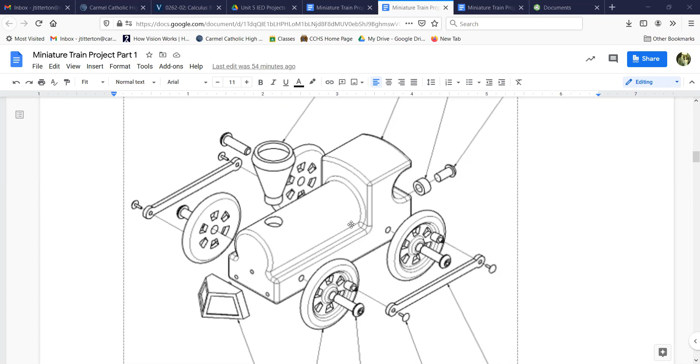All right, we're going to make a train body here. This is what it looks like all put together, but we're just going to do the main body. We have directions down here—I have these printed off. It's dicey, it's hard, we'll see how people do. I've already created them all. This is where we're going with this.

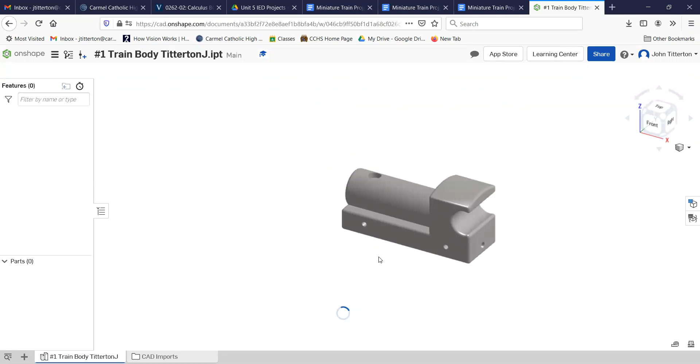Maybe. All right, so you can see it. Not too bad. And then you can actually see it assembled, if I'm not mistaken.

No, I must put it somewhere in here. I don't know where I assembled it. So yeah, let's go to it.

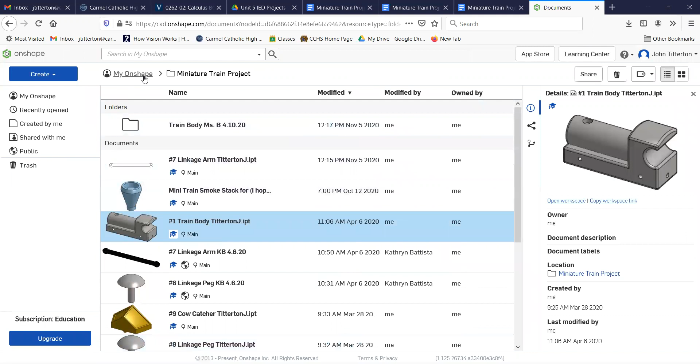I'm just going to go into OnShape. I would recommend making a folder—actually, you have to make a folder, but I'm just going to make a document. Practice train body. I was going to say I actually spelled it right. No, of course I didn't.

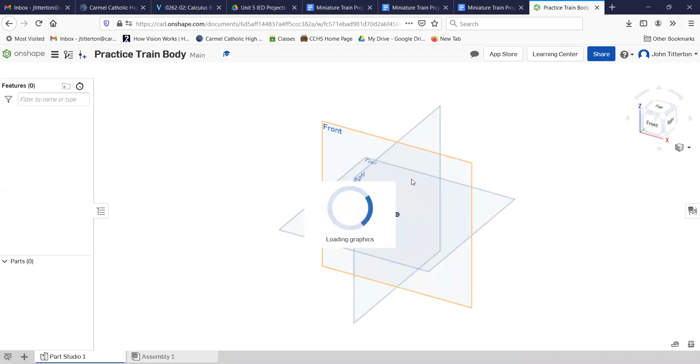Let's go make a train body. Let's go make a train body. Sorry, you don't want to hear the singing.

All right, I'm going to do the cross section first, so I'll call it the front view. Sketch there. Let's start at the origin.

And 5.5 seems to be the length. It's a tough drawing to read, but that's 0.875.

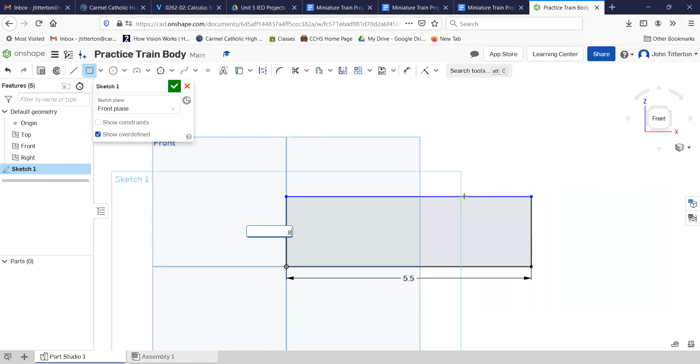Yeah, that'll work. And then another rectangle, starting at this point, and it is 1.75 wide.

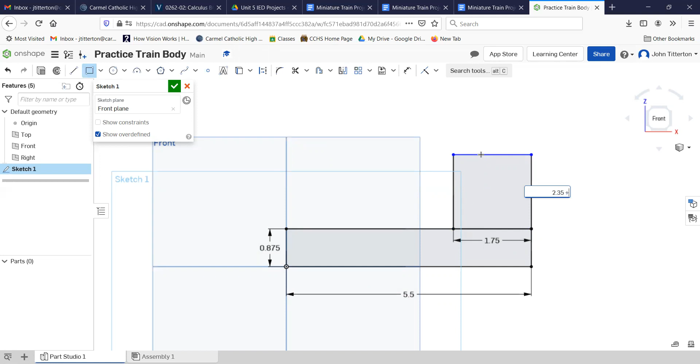And it doesn't say how tall it is—well, it does, but it's a little tricky. I think I'll make it as big as I have to: 2.35 plus 0.375.

And then I've got to carve it out later. The back's actually got a curve on the top, so there's a couple different ways to do that. I'm going to carve it out.

Okay, let's trim away this stuff. And is there anything I want to do with this to make it easier? I could just put this circle in here.

So let's see, we need a line and we'll snap it off of—I don't want to go to the center, we'll go somewhere horizontal. And that should come over 0.25.

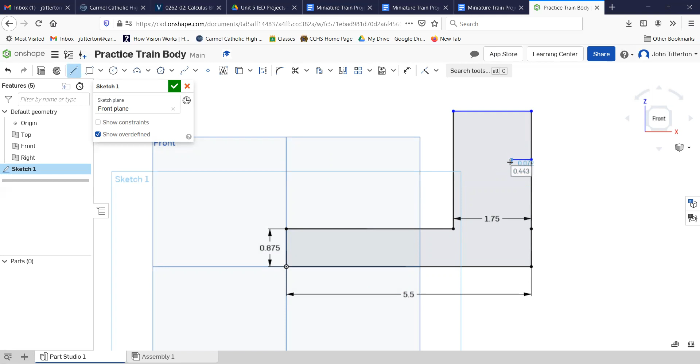And we need a dimension to it from the bottom, which is 1.75. So that's the center of a circle we're going to make, which is a radius of 0.5, so a diameter of 1.

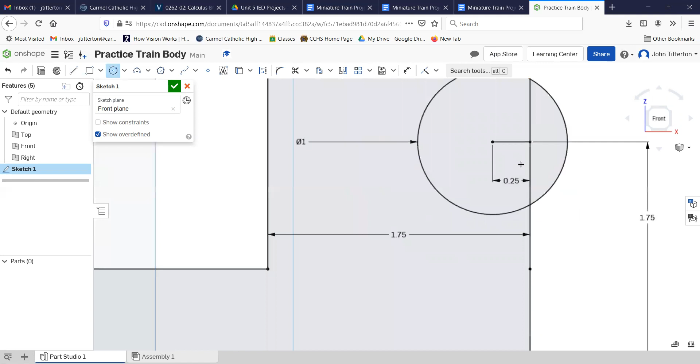I got to trim all this stuff out of here. Oh, it's got a tangent line off the top.

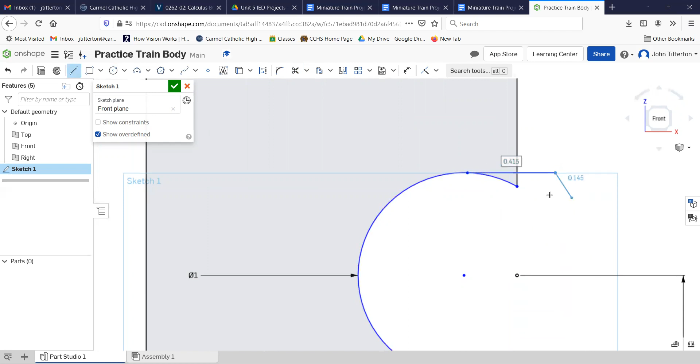I think I'm okay with that. I'll use a tangent constraint. We'll just go here and horizontal, escape the line, and then we'll make sure we are tangent.

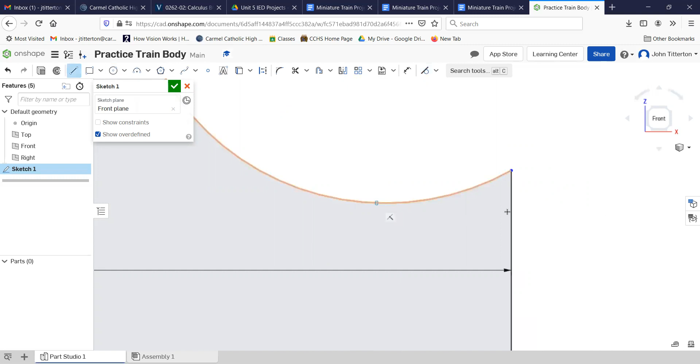Good, wasn't tangent. Down here, same deal. Let's go with a line, make it horizontal, escape the line, and then tangent.

Good, and let's trim out some stuff. Oops. Thank you.

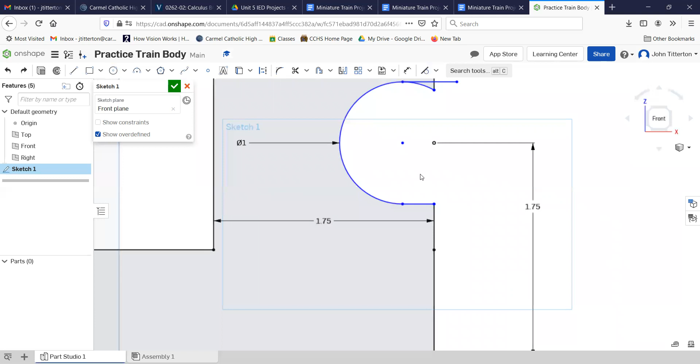Could I do more? No, that's pretty much it. Finish.

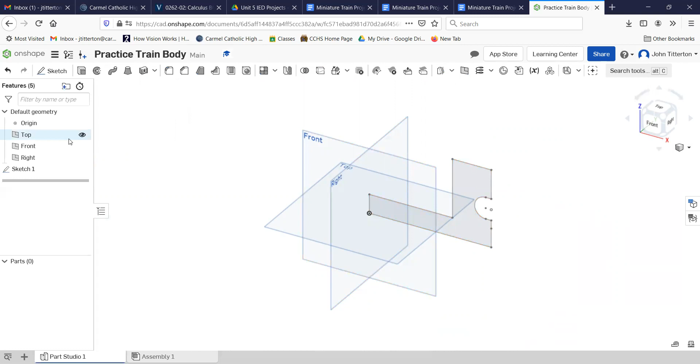Front. Now, if you've ever watched my videos, I tend to start turning off these views. I'm actually going to leave them on now. And we're going to...

Extrude 2 inches. So, 2 inches. Not bad at all. Check, we're good.

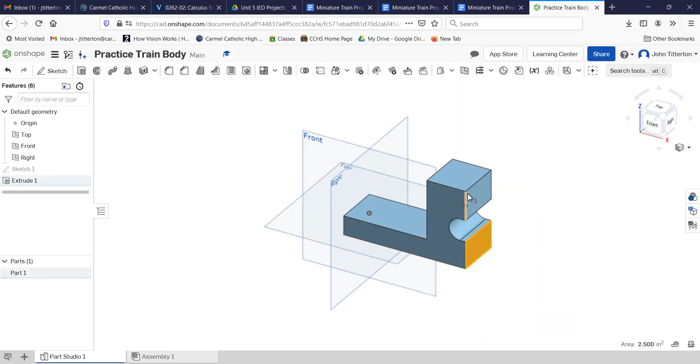All right, so I'm going to do the back because that's the tough one. Let's do a sketch on the back, which will cover the top half too. And we need a point here.

Center of our circle, it's about here. We're going to come up—I'm just going to go with that. And it should be 2.35 times 2.

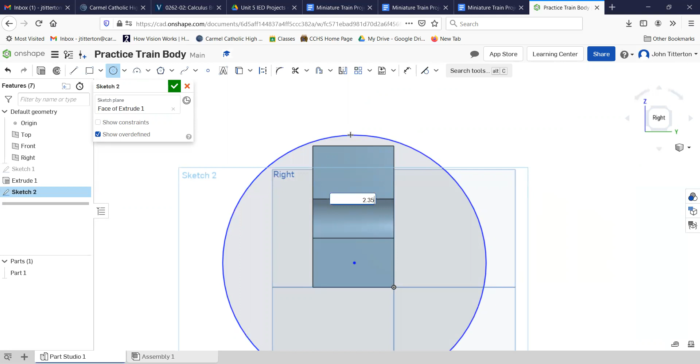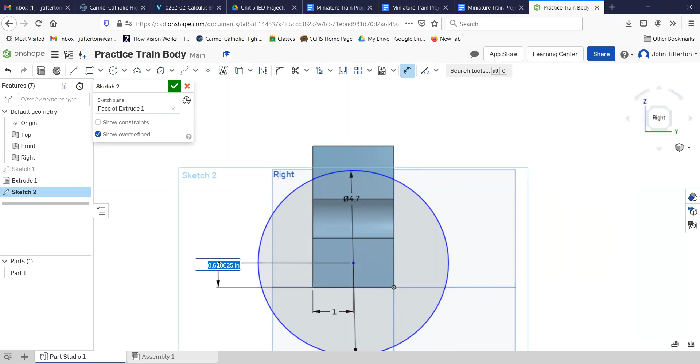All right, we're going to shave this off, but not yet. We got to get it in the center, which is 1 inch. And then I got to get it the proper height, which is 0.375.

I'm confused as to why my circle's up so big. Well, not going to worry about it.

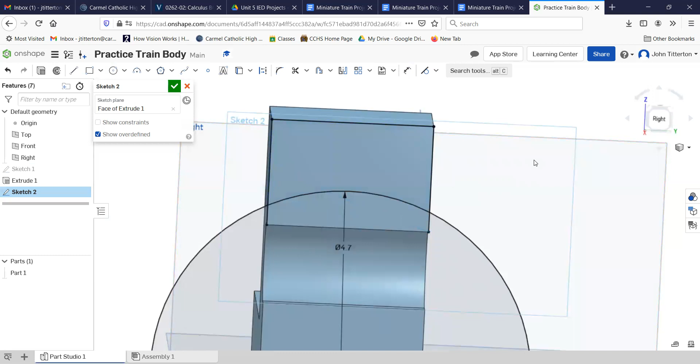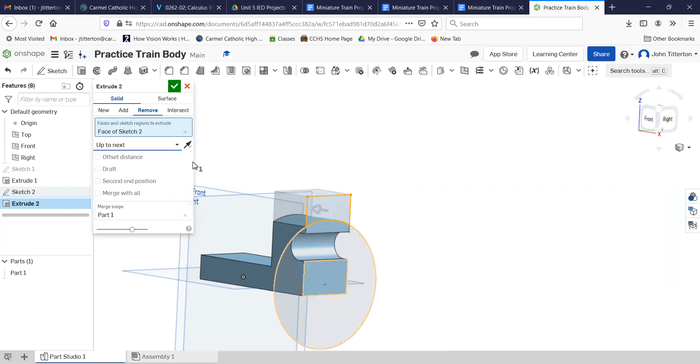Escape line, make sure I'm looking directly at the back. Yeah, I got a shape. I don't have to trim anything. It should all vanish. If not, I'll change it. So done. And we're going to extrude. We're going to extrude a cut this time. I'm going to pick this. We're going to say up to next. Nice. There's the top of the train, and notice all the other stuff vanished.

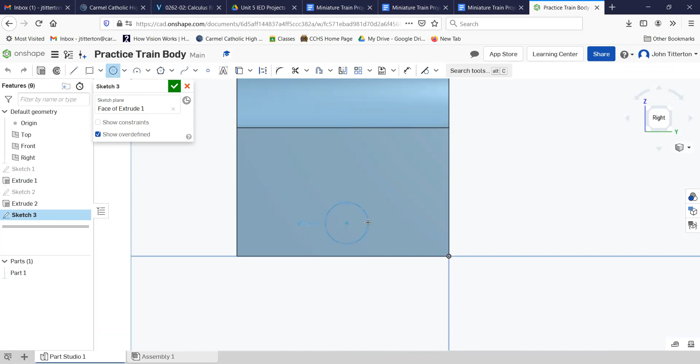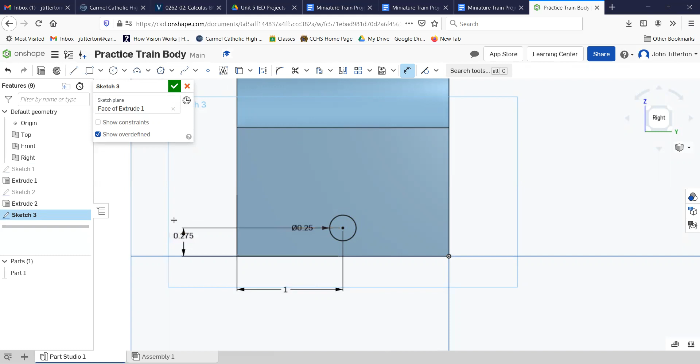I do need to put a hole here. Since I'm staring at it, might as well. It is diameter 0.25 inches. It is 1 inch over. It is 0.275 up. And I have to extrude it in 0.5. There it goes. The hole cut in the back. All right, so the back looks good.

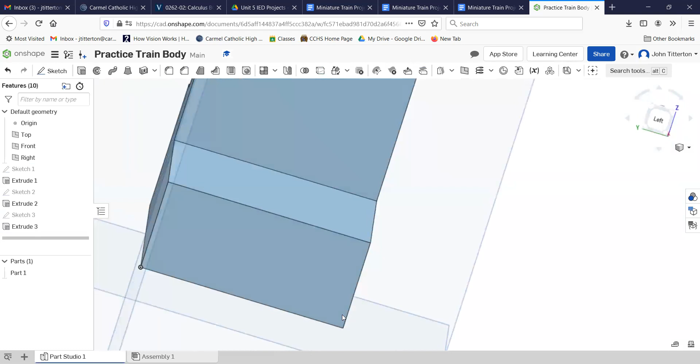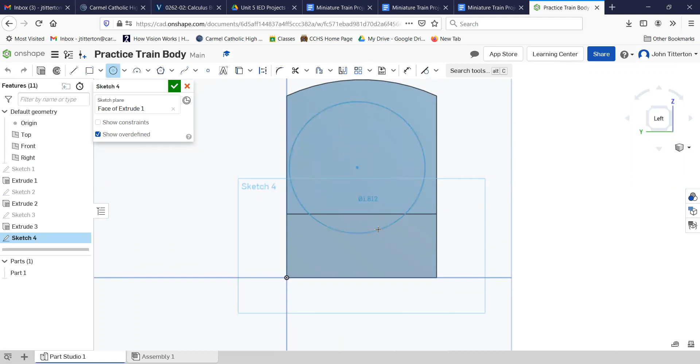Let's go do the front. We got a circle to make. We can make it in this plane. We can make it in this plane. Let me go with this plane for no particular reason. And I'll start a sketch there, and let's look directly at it. Circle's up a little bit higher, like about here-ish. And it is 0.75 times 2. Nice. And it's 1.375 off the bottom. And it is 1 inch in.

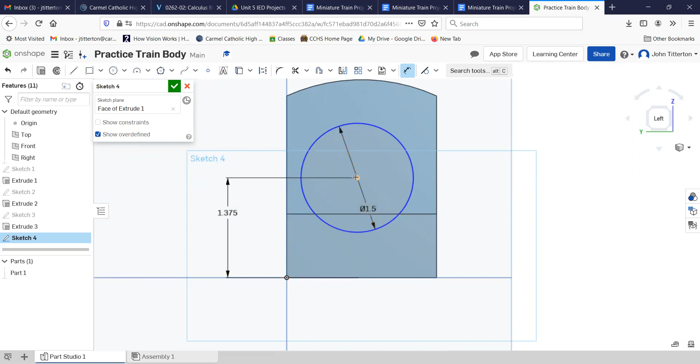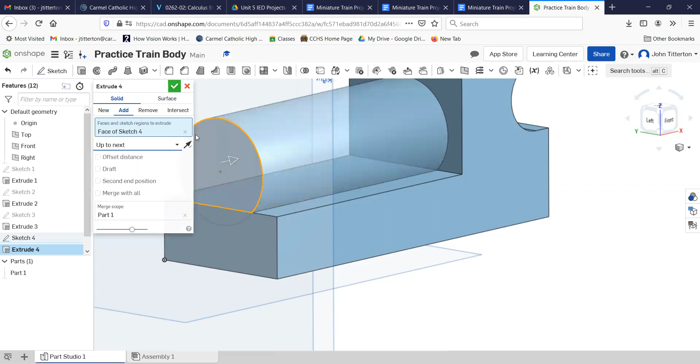That's it, we're done. We extrude to next. Check it. And our body's shaping up quite nicely. Cool. All right, let's put holes in the side. No, let's put holes in the front because I'm facing the front.

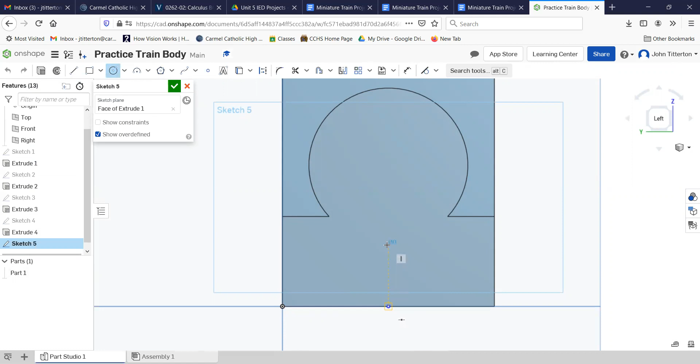And it is sketch 3 holes. They're real small. They're only 0.125 in diameter. One is centered on the center. 0.125. The other 2 are out here somewhere. 0.125. And I'm going to use that over here, so I only have to change one height. So if you didn't see, I hovered over that and it gives me a little yellow dotted line you can barely see. So it just lines them up basically. So whatever this one does, that one's going to do the same.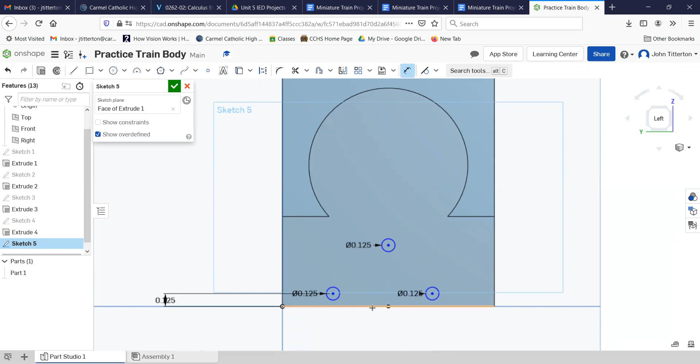And that is 0.125, which seems awfully small. And this one is 0.625. You know, one of the problems with dimensioning these, you're like, hey, I'm done. And no, we're not. You always got to slow the brain down and say, did I get it all? 0.375. Now, those two are not tied together. The one on the right won't move to the right. All right, I take it back. It did. Shouldn't have. 0.625. They're linked top to bottom. They're not necessarily linked left to right. 1.625.

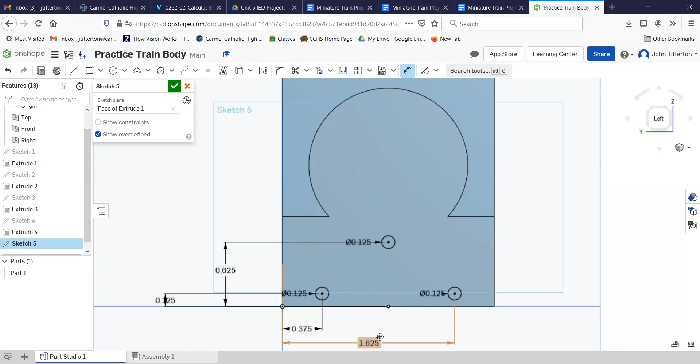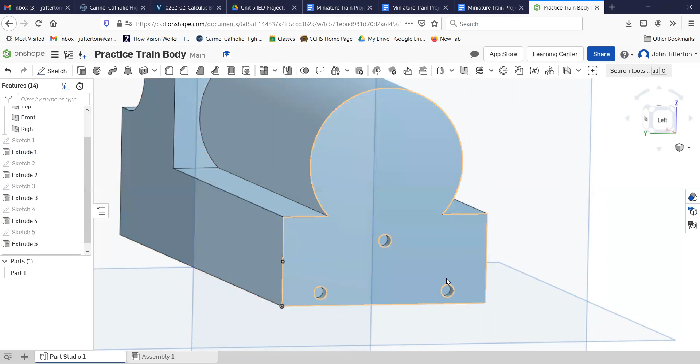Extrude them, and it says in 0.125. Extrude, remove 0.125. Uno, dos, tres. All right, got the front. We got to do a hole on top. That looks hard. Let's do that.

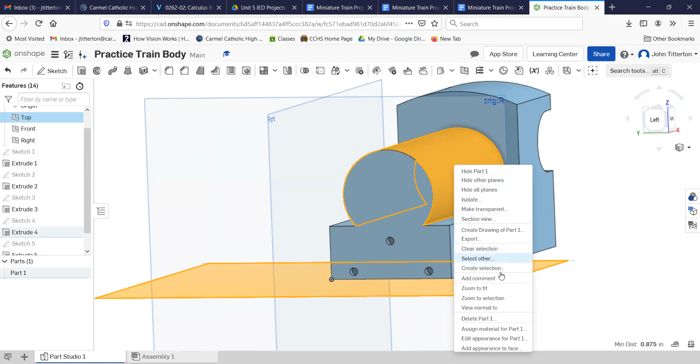Now, I don't know how to make a plane up there, so I want to try an offset plane. Offset plane. Nah, that's not going to work. I want to create a plane. Let's see if it gives me the option here. No, I don't see it. So I have all sorts of tricks for getting planes where I want them, but I should be smart enough to figure out where it is up here. Modify, delete face, move face, replace face, plane. No,

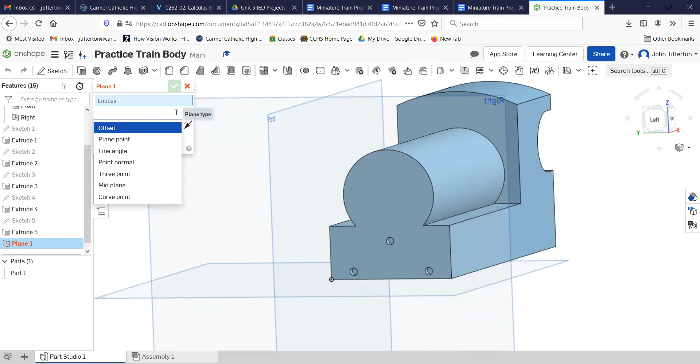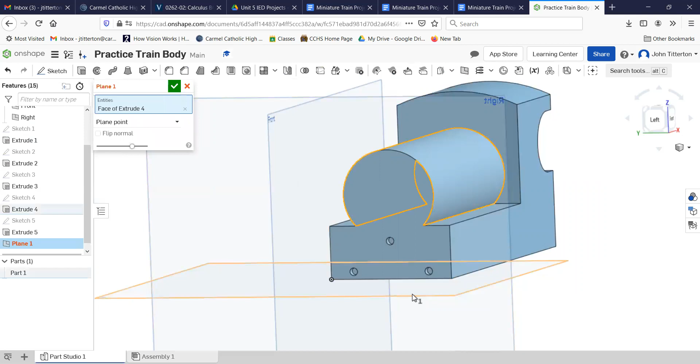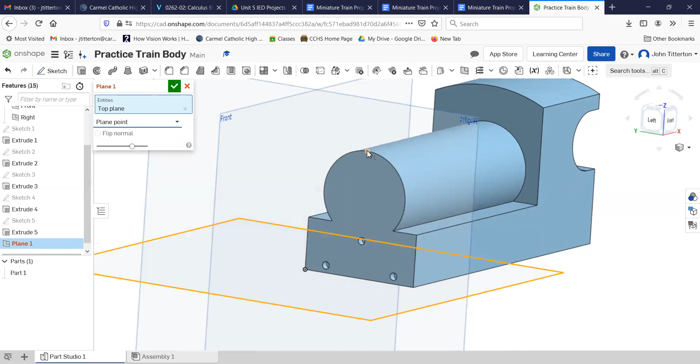you know, I'm going to hover over this, see what it says to me. Create new planes by referencing existing planes. Select reference geometries, set distances or angles as necessary. Well, I'm going to try this entity. And I'm going to try this, see what it does. And plane point. So, oh, did you? It doesn't work for me. Yeah, well, we'll try something else. Exit out of that. Let's try to offset this plane. Offset plane. And let's go with plane point. Pick that. There it is, it worked. That's pretty sweet. Check. Let's do a sketch on this one.

I'm always amazed how many people are afraid of CAD. I mean, just jump in and go. There's nothing else to say. Make mistakes, you make mistakes, not the end of the world.

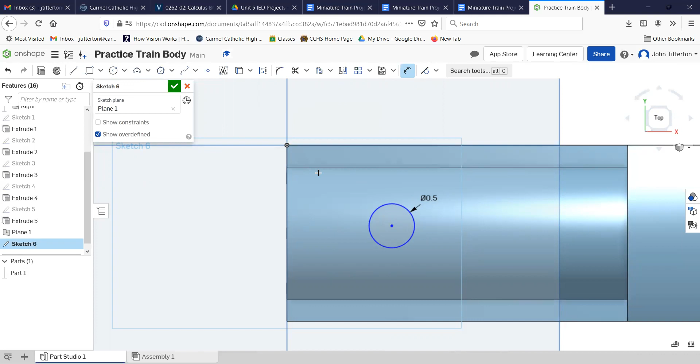This hole is 0.5, and I'm going to extrude it down 0.25. Just I didn't turn, no. Don't know if that worked. 0.5. I was doing something wrong. Okay, and it is on the center line, which I probably could have done a lot easier. It's how far over? It doesn't say, it's just on the center line. So that's gonna be 1 inch from here.

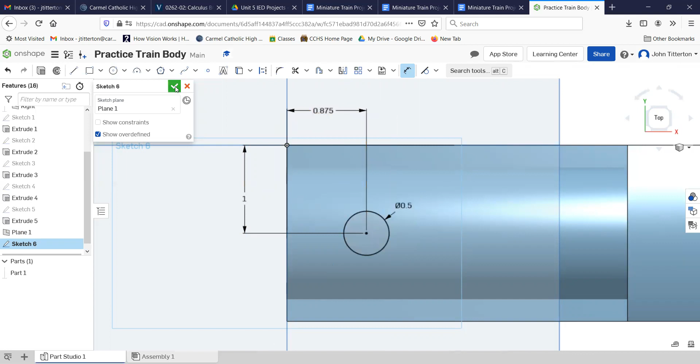Yeah, it looks centered. And then from here to here is 0.875. Check, spin it so I can see it. And now I have to extrude a cut, or remove. It's called cut in the other software we have. And down 0.25. Check.

I'm going to turn this plane off. I don't need it anymore, I hope. That one's kind of tricky. So there's our train so far. All right, looks really, really good. We got that done, that done.

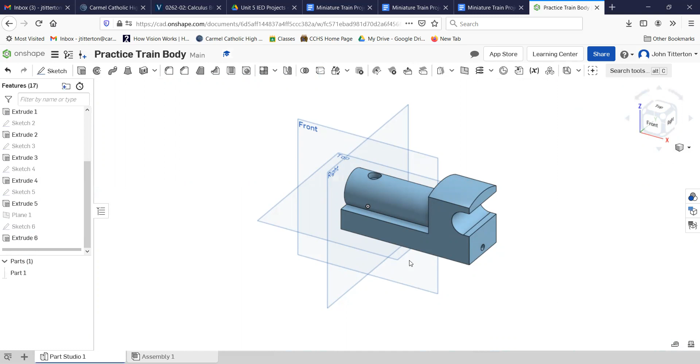We got holes in the side. Now the holes in the side have a thread on them. You can put a thread on them. I will not, because I'm thinking of 3D printing this, and I don't want to put threads in there. It's going to cause problems for the 3D printer. So they are 1/4 inch.

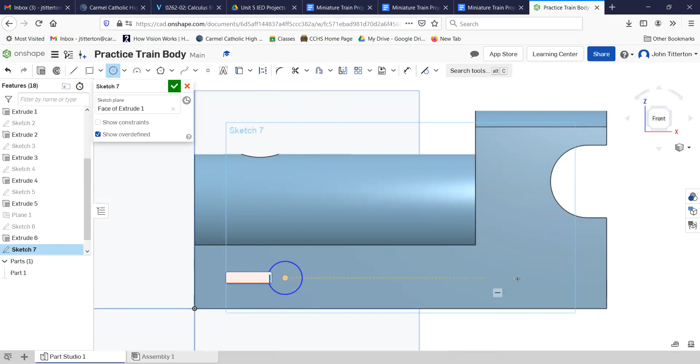This one's about here, 0.25. This one I will lock down in terms of on that same plane. There's my yellow line. This one is also 0.25. This one's 1 inch over here.

Notice my dimensions aren't catching. Maybe my keyboard is finally dying, which I know it is, but I didn't think it was dying that badly.

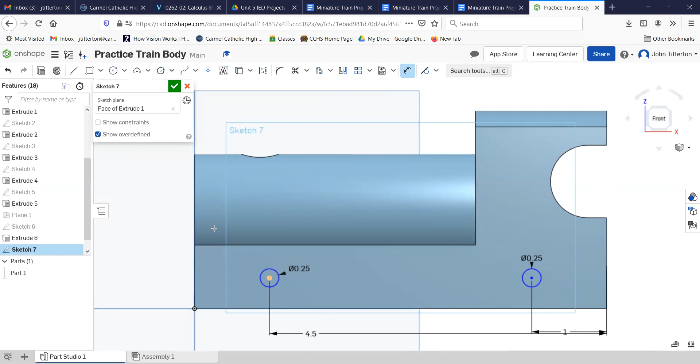1. And this one is 4.5 from the edge. Extrude them down, both down about 0.875. I'm looking, it looks like I've used all the dimensions, so I should be good to go. All right. If I screwed up, then you can yell at me later. Won't be the first time. I just saved that sketch, I hope.

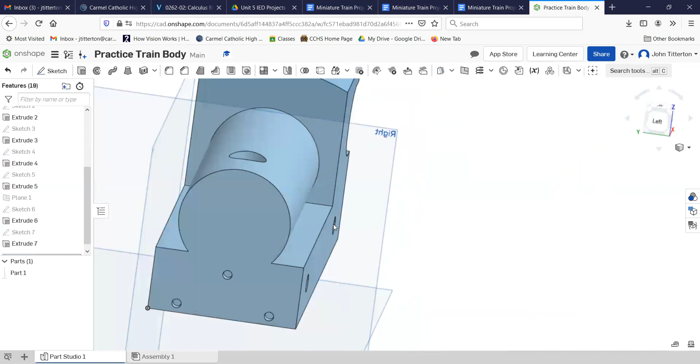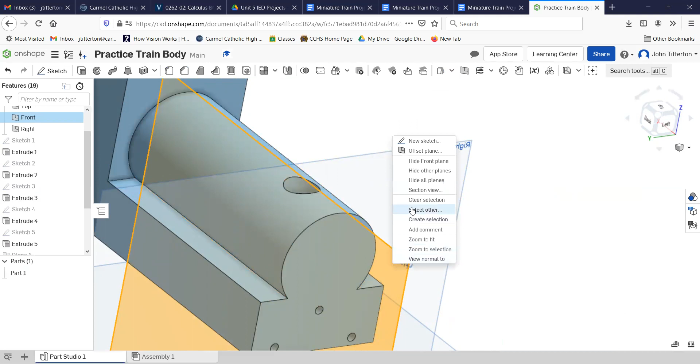Remove 0.875. Check. Do I have a plane down the middle? I do not have a plane down the middle. Sure would be nice if I did. Let's offset this plane. Well, there's my holes. You are going to get offset. So let's right click on it. Offset plane. Or not. Offset plane. And we'll go with through a point.

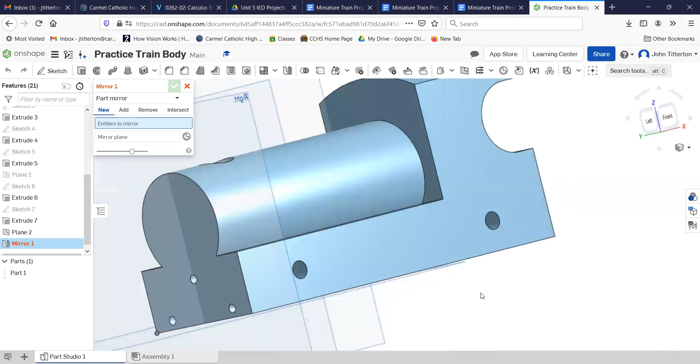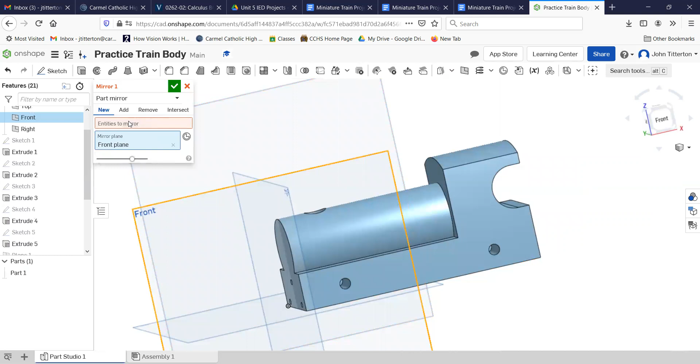So what's up? Why did I make that plane? Well, it's going to be easier to reflect these two. So let's reflect them. First things, entities to mirror. Not letting me pick these. Weird. Let's see if I can pick the mirror plane first, if that makes it happier. I don't know why it's not letting me do it. Mirror plane. This one. Entities to mirror. So odd.

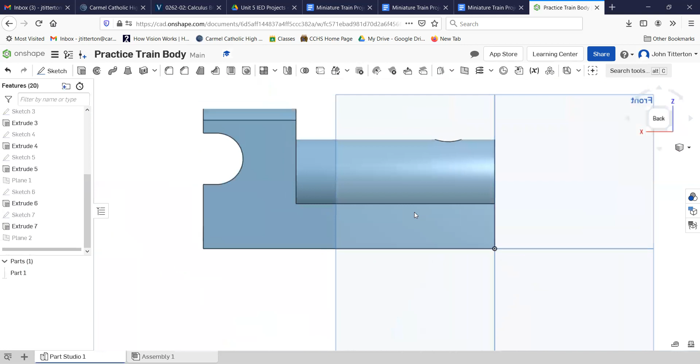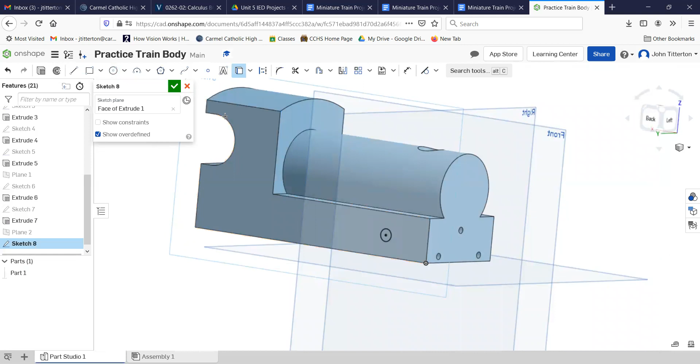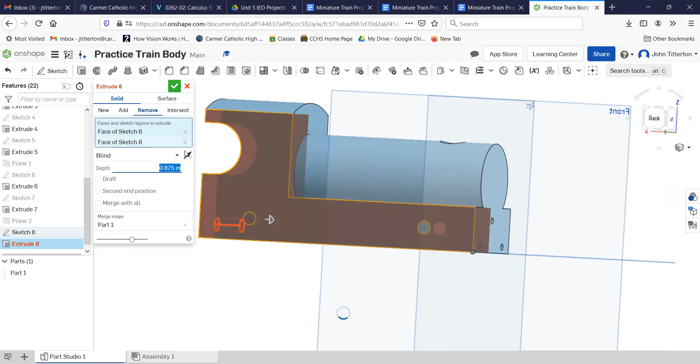Well, let me do it. So this plane was a waste of time, but I tried something. Let's, ooh, it might even let me grab these from the other side. Let's hope so. Sketch, view, circle. Come on, grab the other side. Maybe there somewhere. Fooey. See if I can project. While we're at it, check, extrude cuts. That was pretty cool, I'm not gonna lie. Remove 0.875. What just happened?

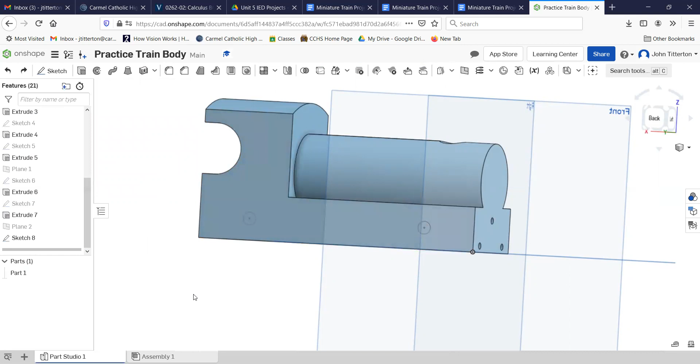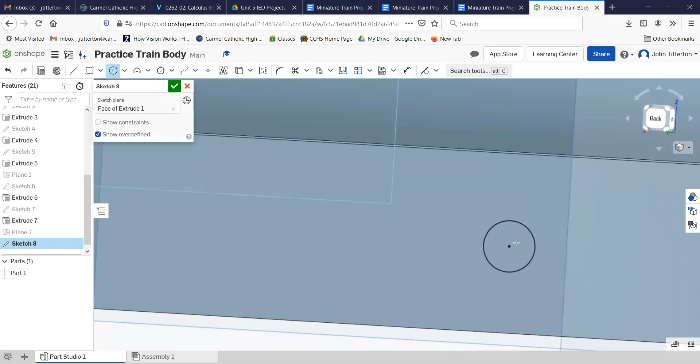My bad. I just realized you have to go and click on them. You have to actually make the same circles, as insane as that sounds. This is not actually existing. It's just there. 0.25. Still not there with OnShape. I'm getting there, but I'm not there. It's still a struggle. 0.25.

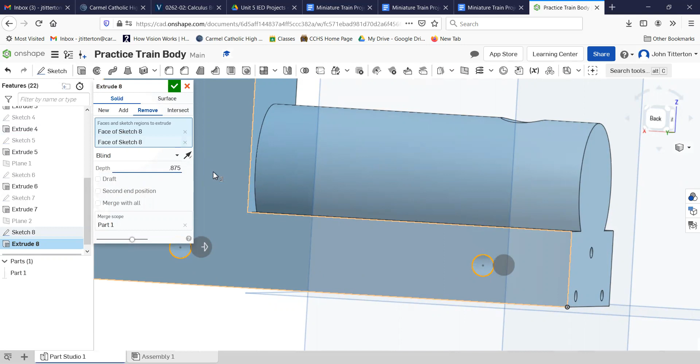Okay, now I can extrude them. Should pick them automatically. There's nothing else in here. Guess not. Remove 0.875. Check. Turn off my planes. Don't forget, you can always turn them back on. Only because I want to see it look really nice. That's sharp. But I did do the front view here, so I should really do it right. There it is.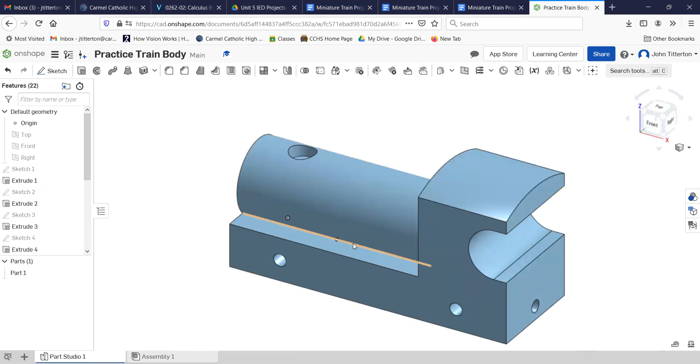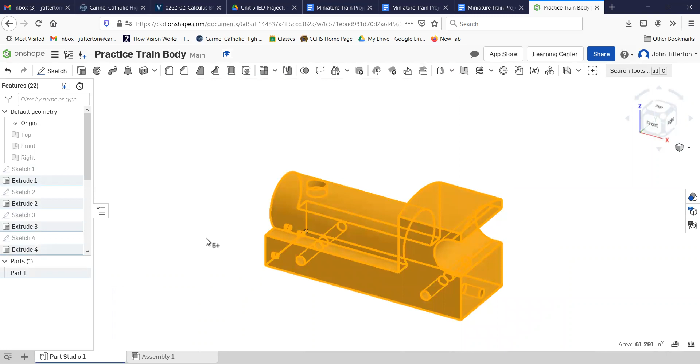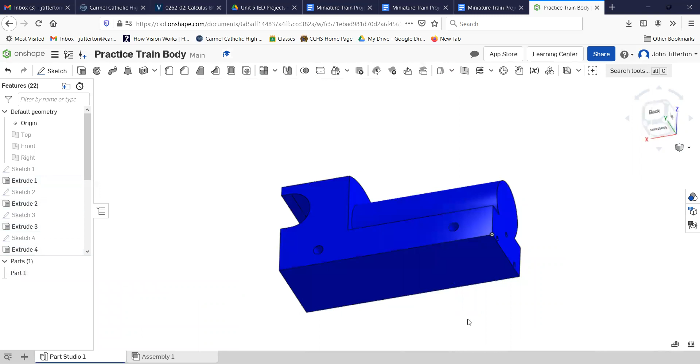I would color this. I don't like the color of it now, so added appearance. Actually, I would assign a material. I told people to use PLA. I'm wondering if you can actually get that. Oh, you can. Wow, I'm shocked. Check. So now it's got a material, and then you can change certain colors, certain faces. I'm going to just go with fire engine red. No, I'm going to have my caboose be fire engine red. Black? No. Blue? Meh, I'll take it. There we go. All right. Good stuff.